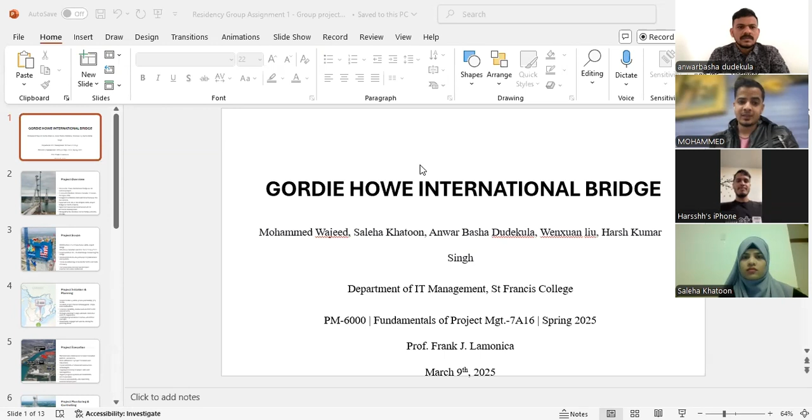The Gordie Howe International Bridge is an international giant socio-structural project that marries Windsor, Ontario, Canada, and Detroit, Michigan, United States. Its primary goal is aimed at the stimulation of business and traffic between the two states. The bridge is among the longest cable-stayed bridges in North America, and it means a big investment in both sides as an area of economic development.

The project is carried out by the Windsor-Detroit Bridge Authority. Its goal is to increase the effectiveness of cross-border operations.

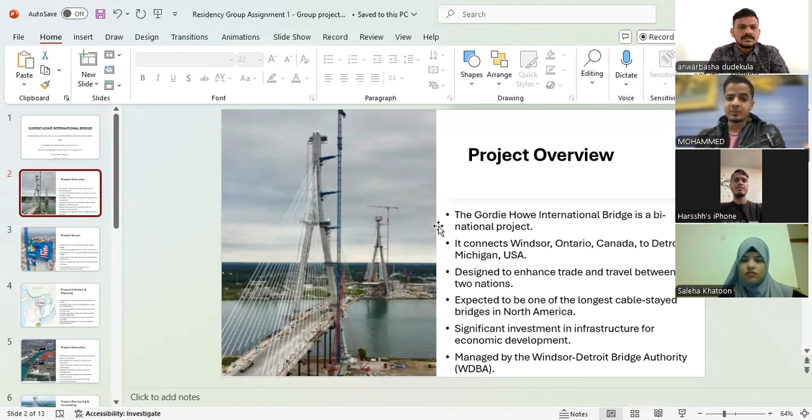As for the project scope: it measures 2.5 kilometers in length and has Canadian and US ports of entry on the international frontier. The project also entails the development of an interchange with the I-75 highway in Michigan. Furthermore, the bridge also includes walking and cycling facilities reserved for the people, making it a multi-purpose bridge.

Environmental tests were made to show how the project will improve the status of infrastructure, while at the same time boosting cross-border transport and business.

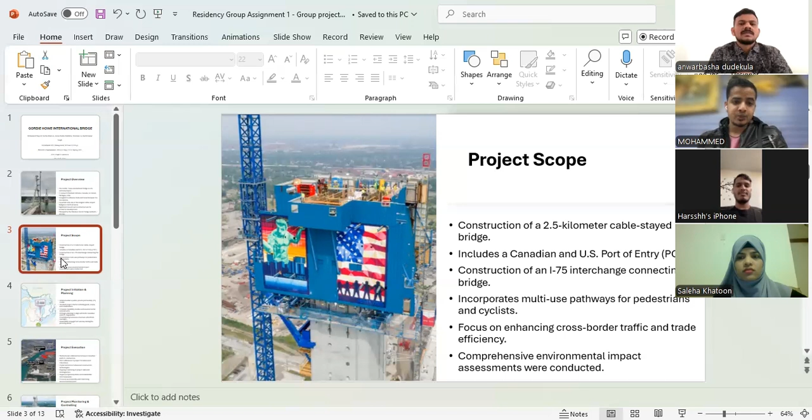It's originally constructed as a public-private partnership, like a PPP model, where both public sectors and private sectors are included to build this Howe International Bridge.

The Gordie Howe Bridge project featured a clear project charter. This charter defined the objectives, project boundaries, and interested parties from the project initiation phase.

In some segments, Canadian and US rules and regulations on the environmental impact of the venture were followed, since feasibility tests and environmental scans were done exhaustively.

A good corporate governance structure was put into place, and the Windsor Detroit Bridge Authority, this is the important one, WDBA as we can call it, was formed for the formation of this bridge.

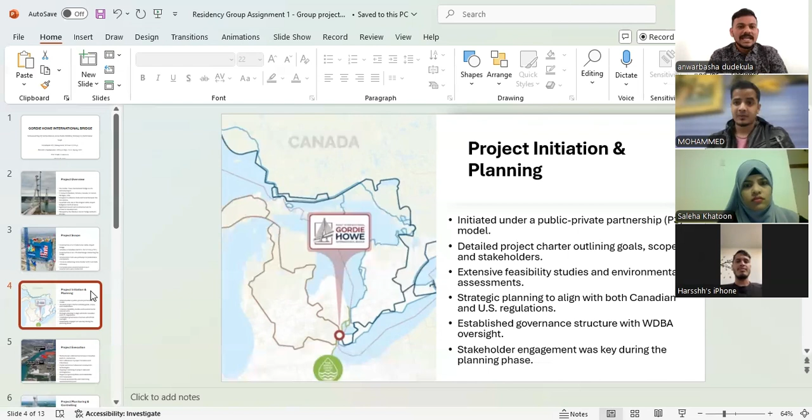It was important for stakeholders to be on the same page during the phase of the project. This board was formed mainly to interact with the stakeholders, because at every step we have to interact with the stakeholders regarding the budget and every detail. Here we can see how the project has been executed in the image.

Here I'm explaining about the project execution. It is a multinational collaboration between both countries, United States and Canada.

Modern construction technologies were applied in this process to enhance efficiency and apply sustainable methods in construction. Risks are kept under check, and new issues that arise are addressed by the preparation of appropriate mitigation measures.

Stakeholders were engaged, meaning that every person was updated all the time, thus reducing environmental degradation at the same time. Mainly while building such huge bridges, they have to take care of the environment and get a certificate from the Green Tribunal Board confirming there will be no environmental issues, so it doesn't affect nearby water lakes and nearby people.

This is how they have started the execution. The next slides will be shared by the other team member.

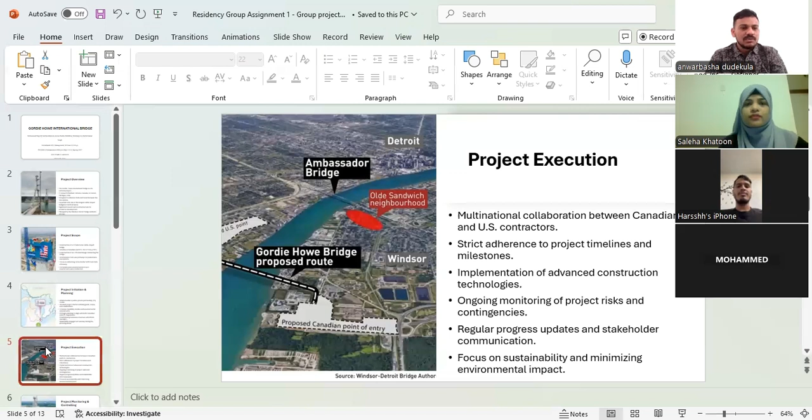Oh, sorry. Hi everyone, I'm Saleha Khatoon, and today I'm going to talk about project monitoring and controlling and its key components.

Monitoring and controlling were very critical because they ensured that the project was on the right track, maintaining a strong focus on comparing the actual performance against the baseline plan. Already in progress was the identification and controlling of risks. The focus was on quality control, and assessment was done at critical stages in the construction.

Expense control was also critical to prevent an excess of budget, and the recording and reporting made the project transparent to the WDBA and others. If the goal was off course, the necessary tweaks were made to bring it back on track.

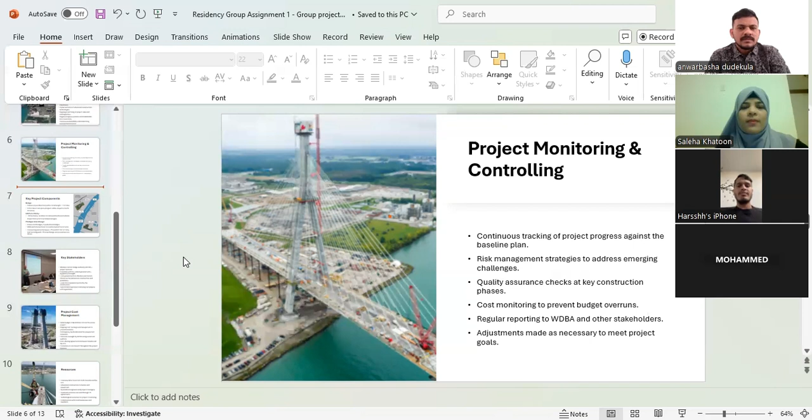When it comes to the construction of the Gordie Howe bridge, the build includes 6 lanes with an overall length of about 1.5 miles. Its main cable-stayed span measures 853 meters, making it the longest in North America.

This station ranks as a major US port of entry and spans a ground area of about 68 hectares, processing passenger vehicles between Michigan and Ontario. The roads and bridge project includes 4 new road bridges, 5 pedestrian bridges, and traffic intersections to accommodate and increase traffic. Continuous improved interconnectivity results from the rearrangement of the I-75 interchange, specifically for the purpose of improving traffic flow.

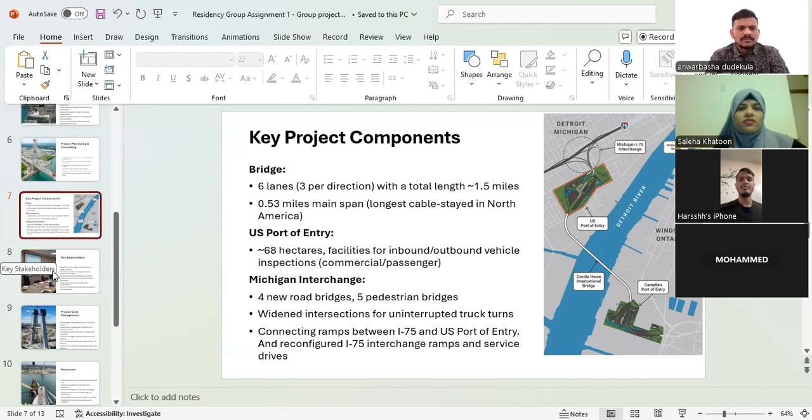Hi, I'm Wenxuan. I'm going to talk about the key stakeholders and project cost management.

The significant stakeholders involved in this project include the principal sponsor, the Windsor-Detroit Bridge Authority. The Canadian and US federal governments play a crucial role in regulatory oversight, ensuring all policies and legal requirements are met. At the local level, governments in Windsor and Detroit are involved in areas like zoning, permits, and infrastructure connections. Private sector partners handle construction and will later take part in bridge operations, bringing in expertise and investment. This project also affects local communities who will experience both short-term construction impacts and long-term economic benefits. Lastly, environmental groups are monitoring compliance with regulations to ensure the project is built sustainably and with minimal ecological impact.

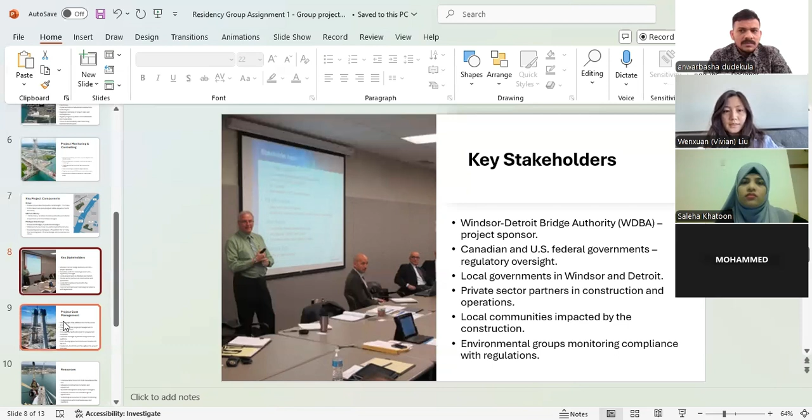Managing cost is a major priority given its initial budget of 4.4 billion Canadian dollars. To keep spending under control, there's ongoing cost tracking and management in place to prevent overruns, ensuring resources are used efficiently. A key part of this strategy is contingency funding, which helps cover unexpected expenses. Financial oversight by the WDBA and government auditors adds another layer of accountability, making sure funds are spent responsibly. Since this is a binational project, there are cost-sharing agreements between Canada and the US outlining how expenses are divided. Throughout the project lifecycle, there is continuous cost-benefit evaluation to make sure the investment remains justified and delivers long-term value.

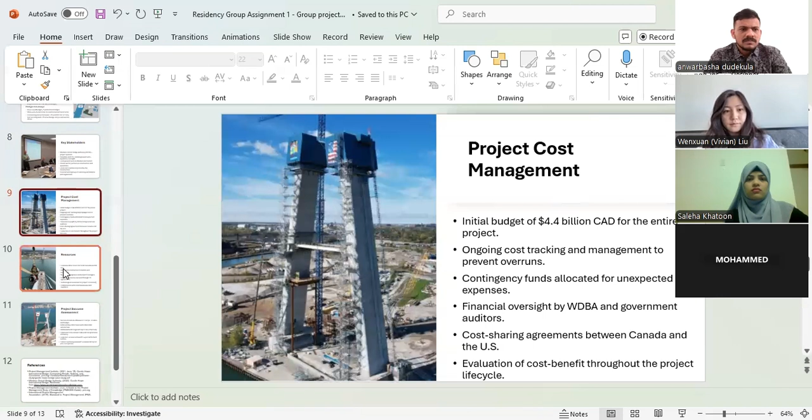Singh, can you start? Hi, hi everyone.

My name is Harsh Singh, and I'm going to talk about the resources and the project success assessment. There were many resources used in this project. There was significant labor input from both Canada and the US, with specialized engineers and project managers managing the project, and construction done using modern techniques and materials. Engineering and construction equipment were employed. Funds were raised with the help of the public and private sectors, and tracking tools and technologies were used. This also included sourcing and purchasing from local businesses and suppliers, which benefits both the local economy and the needs of the project.

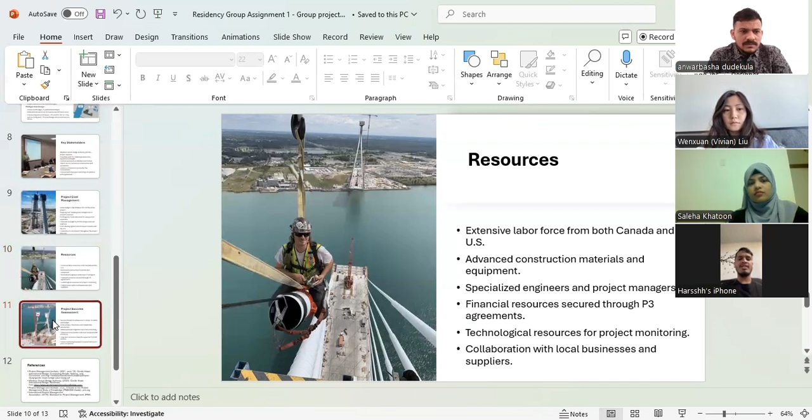Let's come to the project success assessment. According to project management success factors, the Gordie Howe International Bridge project will be evaluated in terms of project scope, time, and cost. Major milestones were accomplished and stakeholders seem to have been satisfied up to the current point. Most of the critical risks of the construction were identified and controlled efficiently. The bridge is expected to have a long-term positive impact by improving the reach and efficiency of transport across the borders. Nevertheless, further evaluations will be necessary to define the broader consequences, primarily the economic changes that the authors assumed based on the presented data.

This is all, now I'll come to the conclusion. The Gordie Howe International Project can be considered one of the most successful cross-border cooperations of Canada and the US. However, challenges have been overcome by the function of well-defined scope, time, and cost frame of the project. Not only will it facilitate the enhancement of trade and communication between two countries, but it will also bring everlasting profits for both of them.